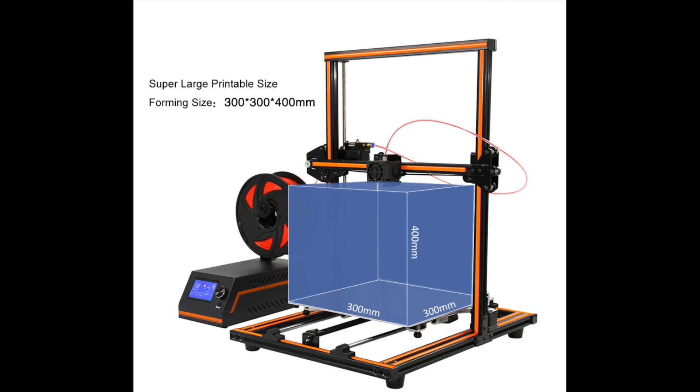Welcome to the third part of the series where I am designing my own printer, based on the BLV. I had built a Cartesian printer a couple of years back during those COVID days. I had ordered the Anet E12 but I was not too happy with it, so I decided to make it into an entirely different beast.

This was my design, made entirely in SketchUp. The Anet E12 is nowhere in sight, but believe it or not, this was made from the bones of that printer. It had all linear rails, dual Z-axis and much more. But alas, like all us 3D printing nerds, I wanted more.

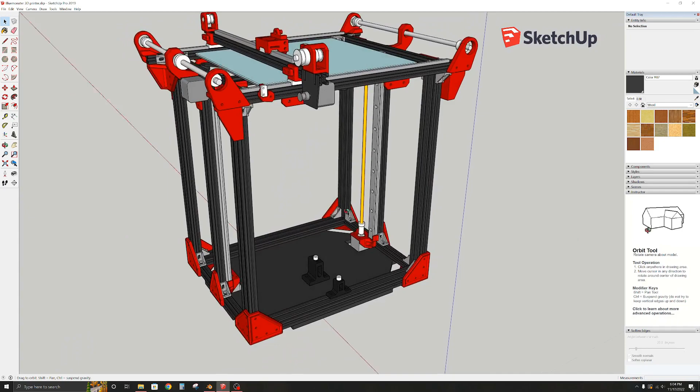There were a couple of things I did not like about this design, such as the use of printed parts for the main mechanics, the weight of the gantry, the non-existent cable management, and a few other minor issues. But the biggest problem I faced at the time was that the frame used non-standard extrusion lengths, which are hard to source. So I had to get the available lengths and cut them to size.

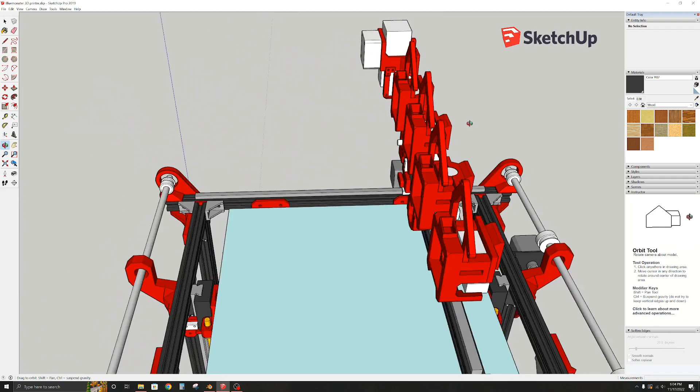All I had at the time was a Dremel, so you can imagine the quality of cuts. And that led to assembly issues and the frame not being square. That is why one of my main design criteria this time around is to use standard length extrusions. The BLV frame also does not use standard length, so you either get the frame kit, or you need to cut them down to size. That is why I am designing this printer with standard length aluminum extrusions.

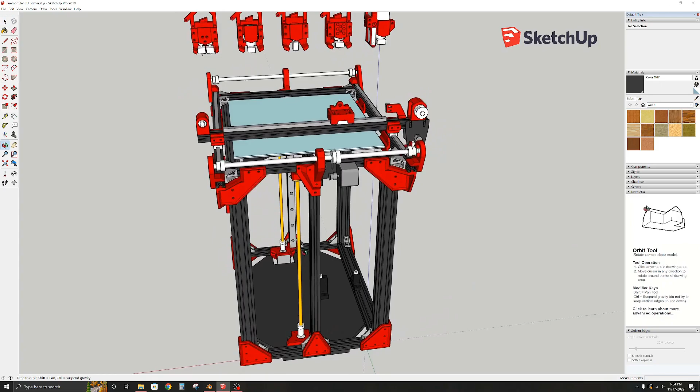So getting on with the build, in the last part I had designed the frame. Now I am quickly modeling the linear rails for the X and Y. For the Z-axis, I have THK SSR20 rails from my previous build, and I intend to reuse those. So I am quickly going to model them as well.

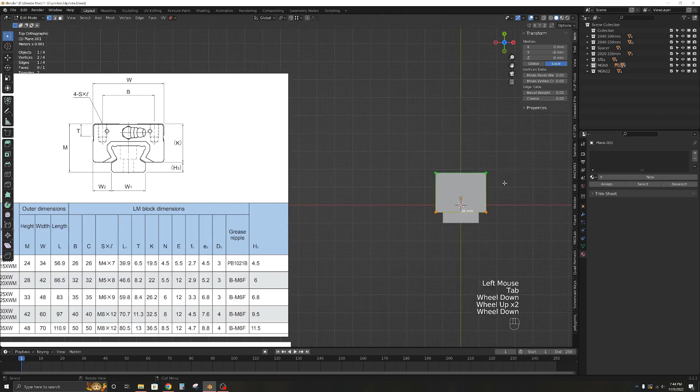I am not making very detailed models of the rails because that will increase the face count. It can lead to a laggy viewport. Besides, I don't need the details as it will not affect the designing process. I just need the overall shape, but the dimensions need to be precise. With the rails modeled, I quickly align them with the frame. And then I model the print bed.

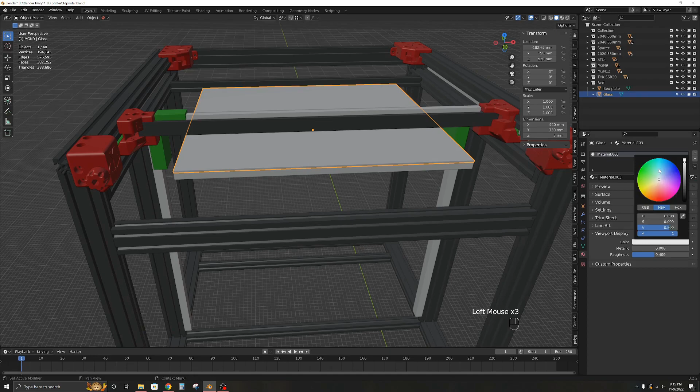At this point the size of the print bed is 400 by 350, which is what I had for my previous build, and I was intending on reusing it. I was planning on using a dual Z-axis, synchronized with a belt, same as my previous printer. But then I did a quick count of leftover components that I had and realized I could have triple Z-axis. And so I started working towards that.

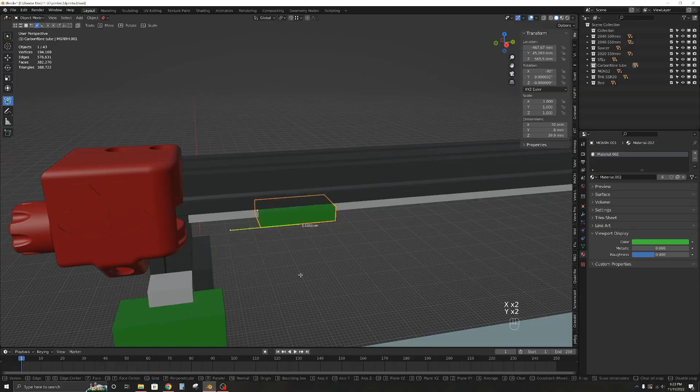I have an SKR 1.3 board, so it does not have enough stepper driver slots to handle triple Z-axis. That was a bummer. Then I came across this expansion board by BigTreeTech. With this I can have triple Z-axis along with dual extruders, and still have a spare slot. Only downside is, I will not be able to use a display. But with Klipper and Mainsail web interface, I can live without a screen. So with a few tweaks to the design, lo and behold, triple Z-axis.

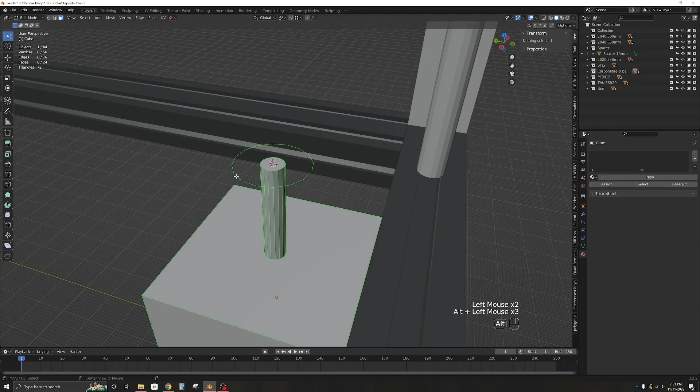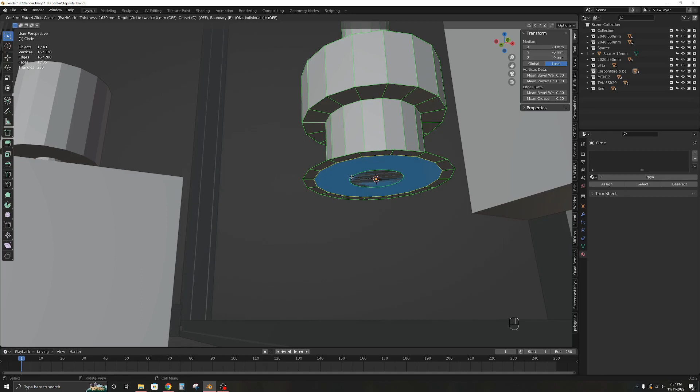The next part in line is the lead screw mounts. Normally the lead screw is resting directly on the stepper motor. A stepper motor has a compressible spring washer within it, so that introduces play and can result in inconsistent layer heights. A simple yet effective solution is to use thrust bearings. So here I designed the lead screw to be resting on the thrust bearing. However, a thrust bearing cannot take radial loads, so I have to add another ball bearing for that. The lead screw will directly sit on the printer frame, and that will ensure extra rigidity.

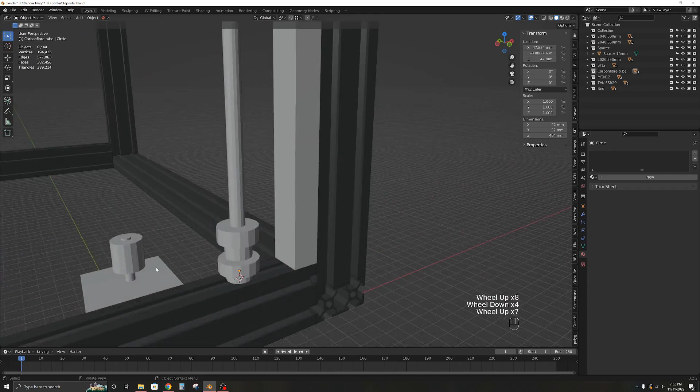The motor can be mounted to the side, and with the use of belt and pulleys, it can drive the lead screw. An added bonus of the belt and pulley system is that it can provide gear reduction. So I will use 16-teeth pulleys on the motor and 32-teeth pulleys on the lead screw. That effectively doubles the resolution of the Z-axis. While it does not automatically translate to a better print resolution, because that depends on many other factors, it will ensure that a few missed microsteps will not have that much of an effect. In a nutshell, we get more consistent results.

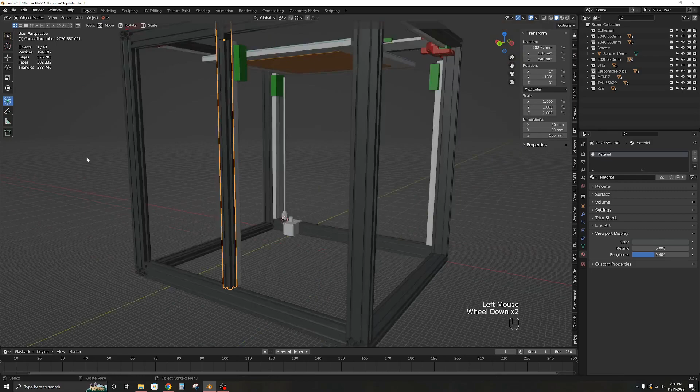I also added anti-backlash nuts and Oldham couplings for good measure. The Oldham couplings ensure that any wobble in the lead screw is not transferred to the print bed. It effectively decouples the X and Y movement of the lead screw. The results of this are debatable, so that is something I am going to have to investigate further once I actually build the printer.

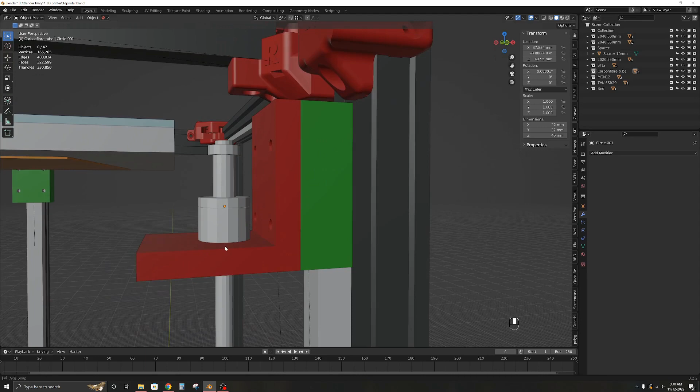I have designed the Z-axis blocks such that they can be easily printed but also easily made with aluminum flat bar. I am trying to minimize printed parts and use metal parts where possible to improve the reliability of the printer. Now I need to attach the bed to the Z blocks. The most common solution is to use bed springs because they allow manual bed leveling, however the bed is free to bounce around. And this really affects the quality, especially for taller prints. I don't need manual leveling as the auto bed leveling and triple Z-axis will take care of that.

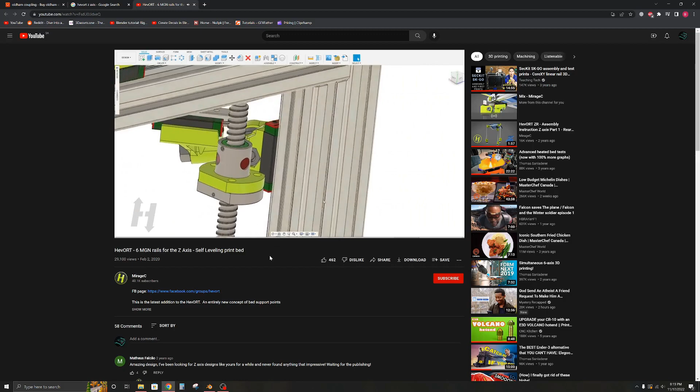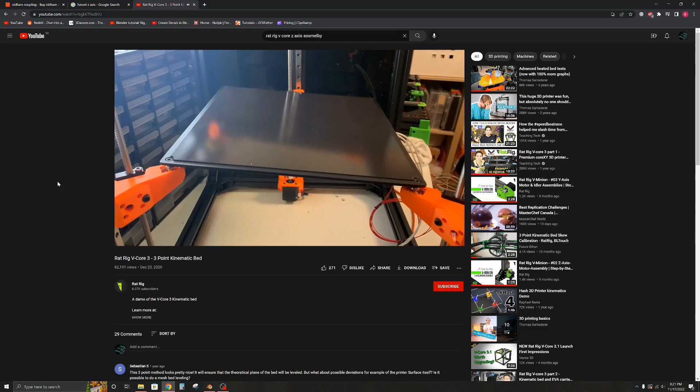There are a few options out there like the linear rails of the HevORT, spherical bearings of the Voron Trident, or kinematic couplings of the Rat Rig. The HevORT system looks cool but would unnecessarily increase cost and complexity. I really like the kinematic coupling solution. It allows the bed to tilt freely with the triple Z and also allows free expansion of the bed with heating cycles. And you don't need any additional extrusions. The bed sits directly on its mounting points. The hardware is also relatively inexpensive and easily available. You just need some magnets, dowel pins and threaded steel balls.

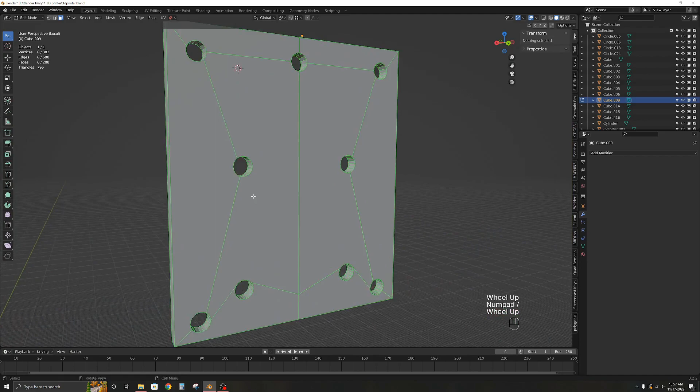I intend to use the Hermit Crab tool change system with my printer. So here I quickly figure out a way to mount it to the carriage. It is possible to use the plates that came with the BLV metal kit, although I will have to drill some holes in them to mount the Hermit Crab. Finally, I bring in an E3D hot end.

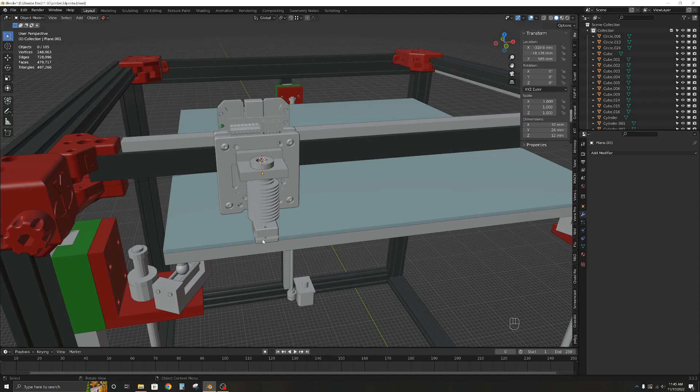That takes care of the major components of the printer design, but it is not even close to complete. However, it gives me enough to start my build. In the coming days I will start the assembly process of my printer and revisit the design as required. I will probably have to make many tweaks to the design. Once I have successfully completed the build and ironed out all the kinks, I will share the final design files of the printer.